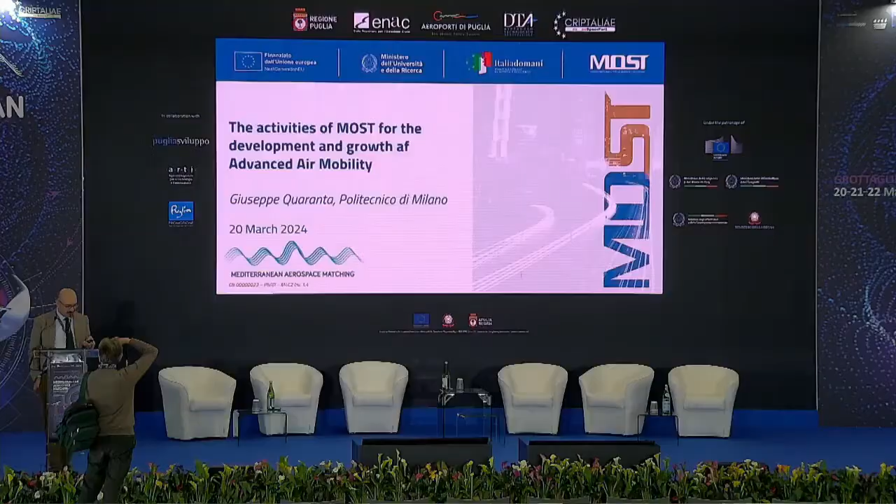So what I will present today is the activity of the MOST, that is Centro Nazionale per la Mobilità Sostenibile.

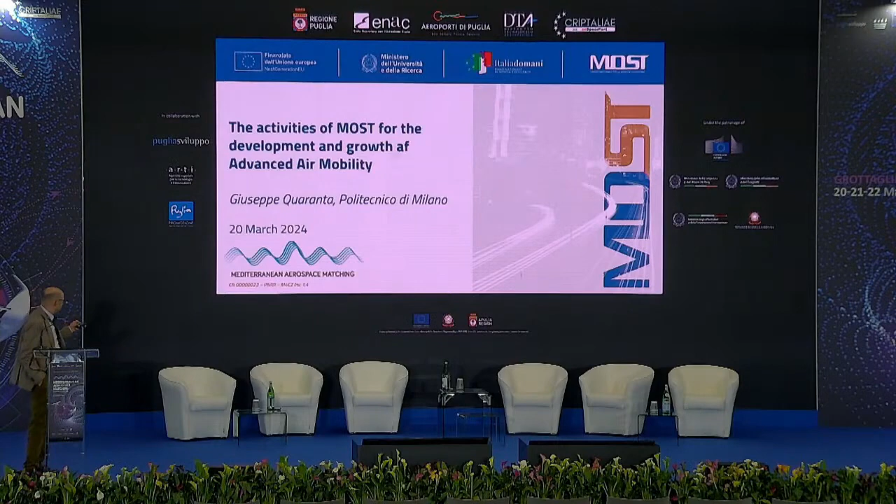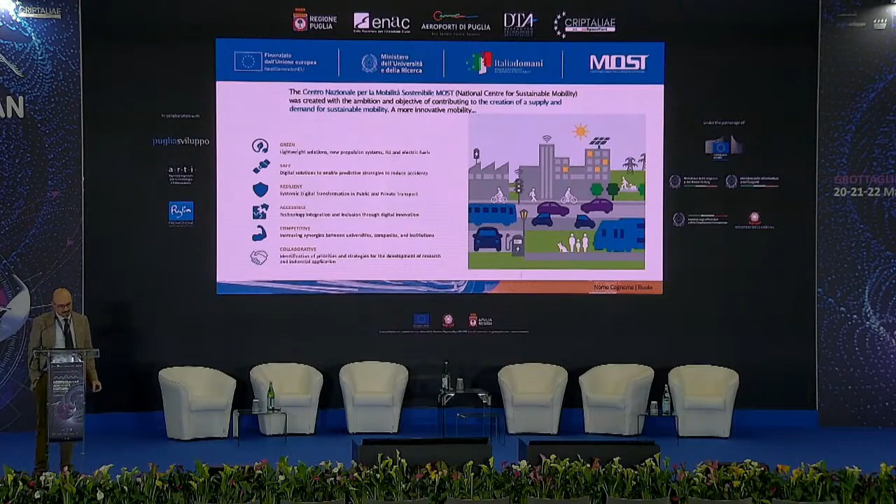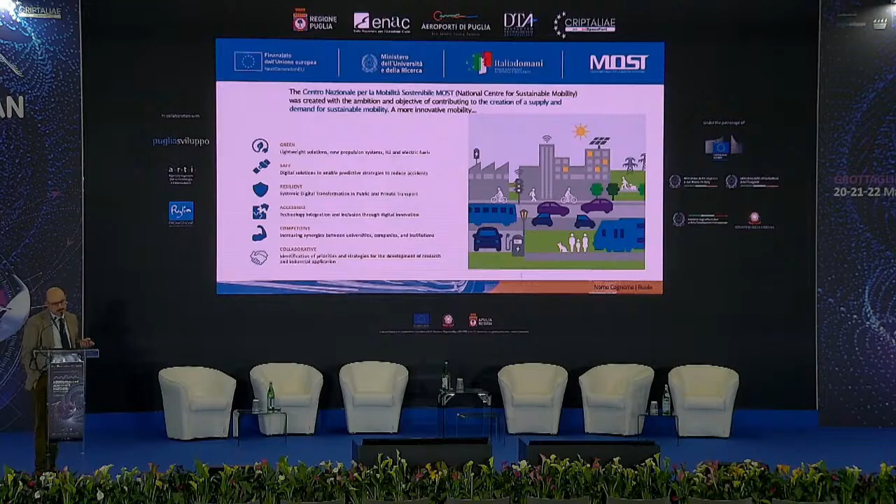Okay, so first, what is MOST? So il Centro Nazionale per la Mobilità Sostenibile has been created with the ambition to support the development of a new way of sustainable mobility. So the more sustainable mobility will be a mobility that will be greener, safer, more resilient, accessible, competitive, and collaborative. MOST is organized with this structure with a hub and a spoke.

So we have a central hub that is coordinating the activity of 14 spokes dedicated to different parts of the ecosystem that compose mobility. The hub manages the program in terms of resources allocation, innovation and education, and initiatives to globally increment the TRL of the projects, while we have several spokes that will work really on the research at high TRL with a collaboration between universities and private companies, and development of local infrastructures and laboratories at the state of the art.

So right now we have 25 universities in Italy that are collaborating in MOST together with research centers, and 24 companies that are major companies operating in Italy in the sector of mobility. So we have Ferrovie Italiane, Autostrade, Ferrari, Pirelli, Poste Italiane, and of course also aerospace companies like Leonardo and Avio Aero. The structure of MOST is a matrix structure.

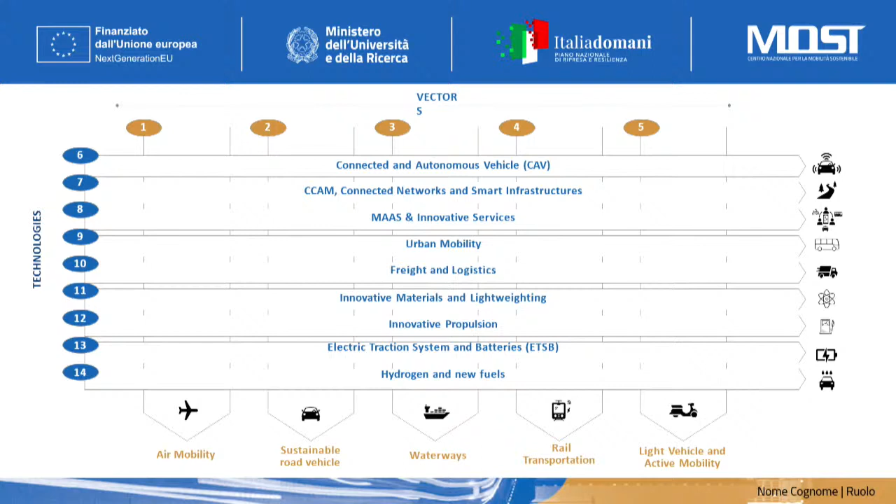In particular, today I'm going to talk about the spoke air mobility, since we are talking here about aerospace. The spoke of air mobility is organized between 6 main universities, is led by Politecnico di Torino, then of course we have Politecnico di Milano, University of Bergamo, Bologna, Federico II, and La Sapienza from Rome. And we have the collaboration of 6 major private companies, Avio Aero, Thales Alenia Space, Teoresi, Accenture, Leonardo, and Poste Italiane.

The objectives are, on one side, the development at spoke-wide level of drones, cargo drones, and urban and advanced air mobility. And on the other side, the development of hybrid electric aircraft, and so technologies that will allow the implementation of hybrid electric aircraft. And on the other side, we have the groups that are working on the development of digital twins and on the development of passenger and goods management in the developed new mobility system. So the spoke is organized around 6 work packages.

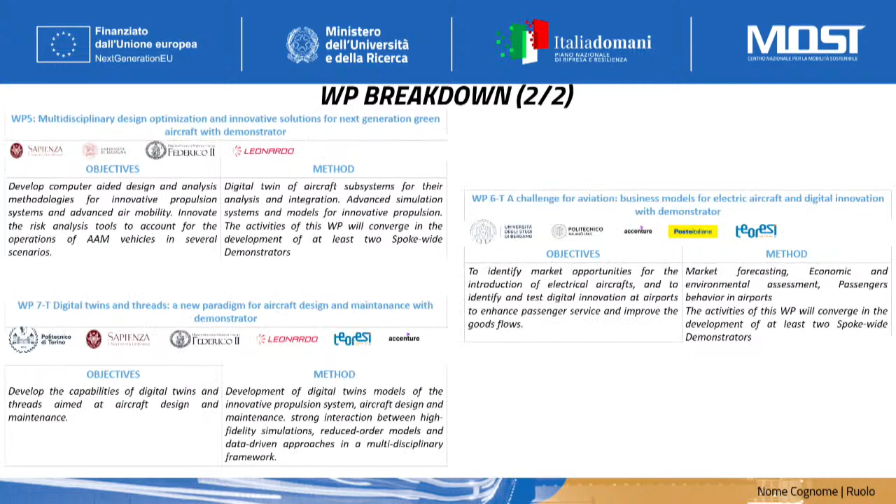Sorry, I need to go. Is there a way to go back?

If we want to reach this goal, so to have those vehicles fly in our cities, there are still some technological hurdles that we have to overcome, but there is also another related to acceptance of those types of vehicles in the urban environment. So the object of the activity of spoke one of MOST dedicated to advanced air mobility is really on the acceptance of those types of vehicles. So we developed several tasks in order to investigate the elements that will mostly affect the acceptance of this type of mobility in the urban environment.

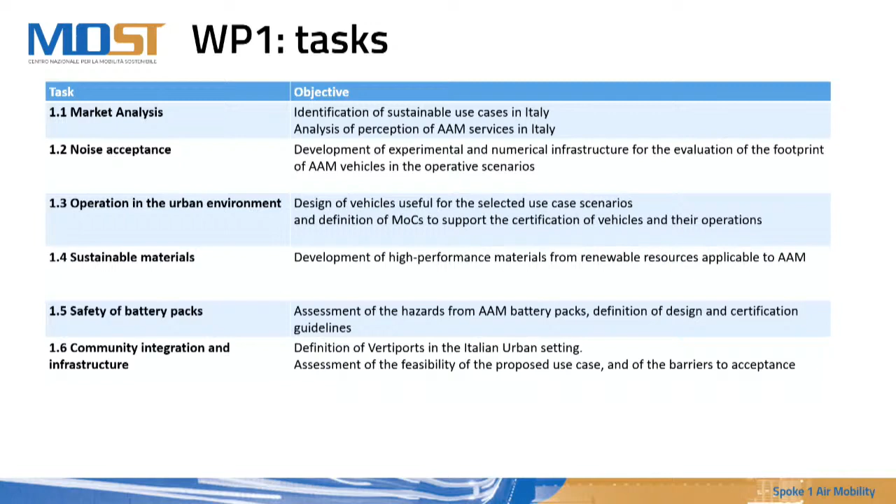In particular, we're going to work on the noise acceptance of operations, and so understanding how safe operations could be implemented in the urban environment. Acceptance related to sustainable materials, safety of batteries, and in particular, what could happen if a battery pack impacts the ground, and acceptance of infrastructure and community acceptance.

I will present just a couple of labs that we are developing. One is a lab dedicated to batteries. A major safety concern is related to the possible impact of batteries on ground. So we are developing a drop tower to drop batteries on different surfaces, ground surfaces, also water, so to understand what is the consequence of an impact of a battery pack, and to design systems that can manage the energy generated in the impact in order to have a safe impact that will not generate any hazard for the public.

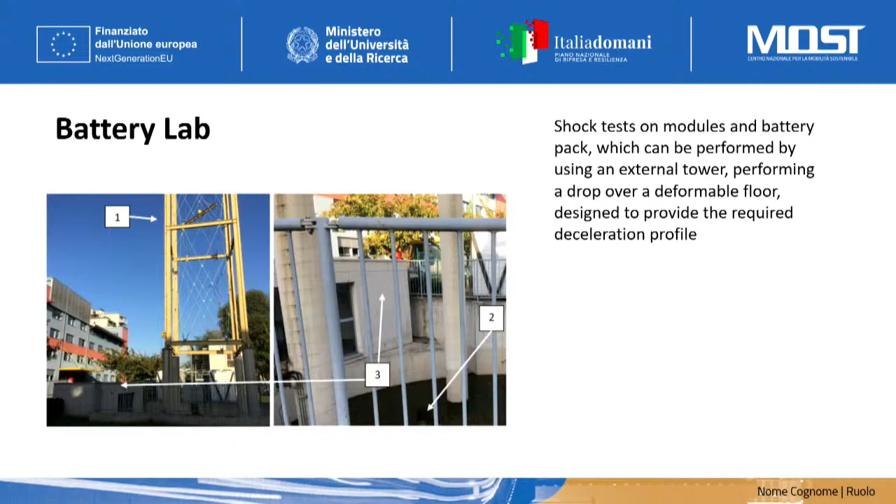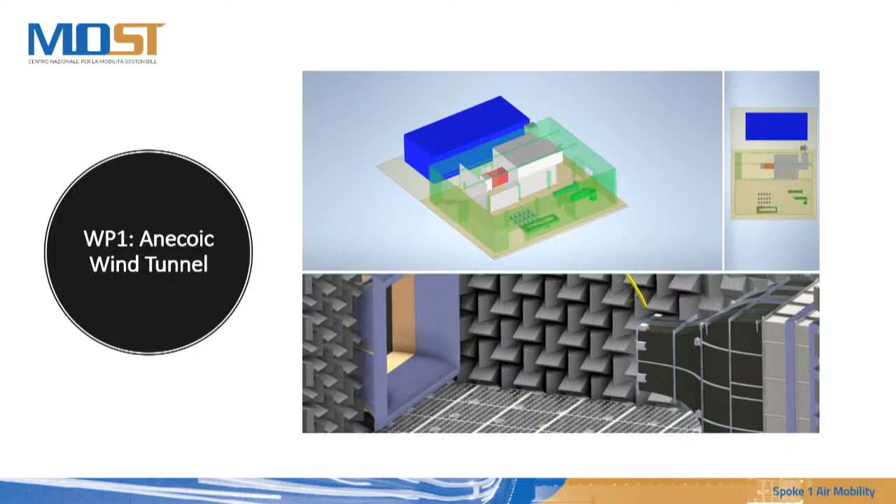The second lab we are developing is the lab dedicated to noise. So we are developing a new anechoic wind tunnel. At Politecnico di Milano, we have a long tradition of wind tunnels. We have a large wind tunnel and a small wind tunnel that are already fully operative, and now we're going to build this noise wind tunnel in order to test noise developed by urban air mobility vehicles, and so assess again what could be the impact of those vehicles in the communities that will see those types of mobility implemented.

The third lab I want to talk about is the lab of certification by simulation. Already Cristina Leone was talking before me about digital twins and the necessity to develop those digital twins also to perform certification activity. The objective we have here is to recreate the environment, the complex wind environment that is generated when those types of vehicles fly close to obstacles, get the data out of test labs and inject those data in a digital twin that will perform a digital simulation, maybe using virtual reality, to assess the safety of different operations in different environmental conditions in this system.

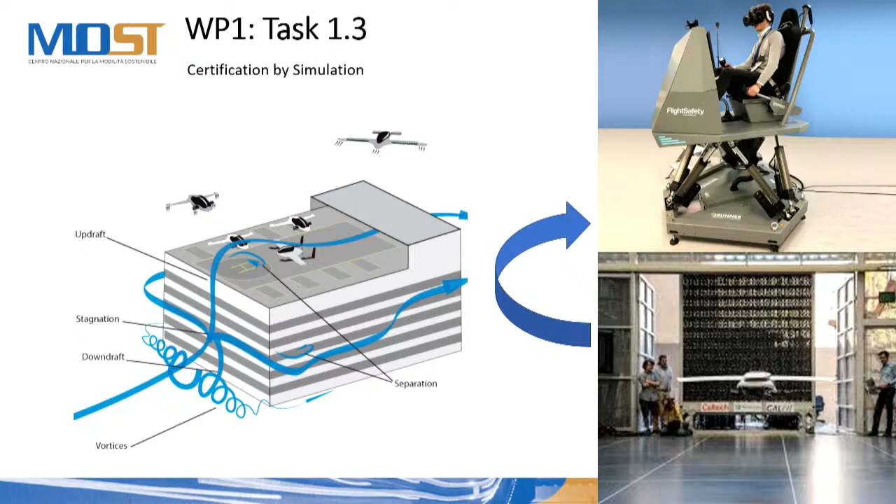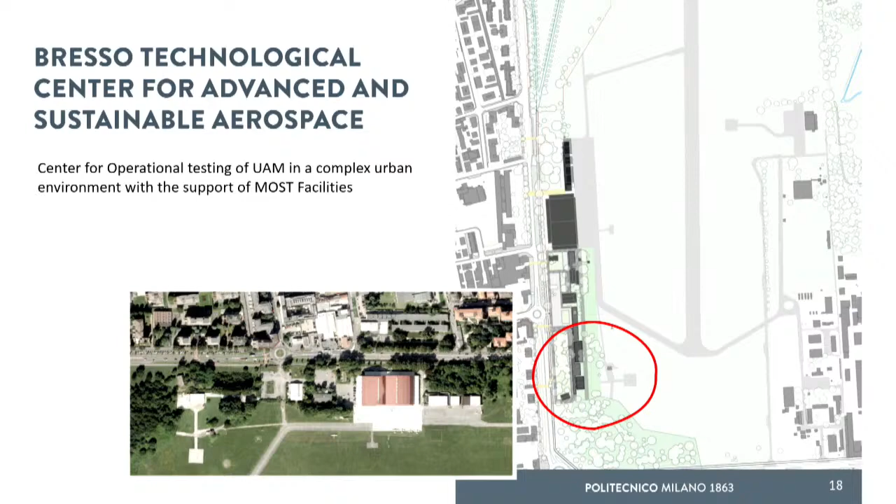All those things will eventually converge into a physical lab that we are trying to develop over the Bresso Airport in Milano. Bresso Airport in Milano is a city airport that is really embedded in the city, in the city of Bresso, very close to Milano. So it is really a prototype of what could be an urban vertiport that could be used as a hub for this type of mobility. So the idea we have at Politecnico di Milano in particular is to develop a testing facility in order to test how urban mobility can operate in a complex urban environment, such as the one of Milano.

The last thing I want to talk about is related to a testing activity that we are trying to perform together with our industrial partner in the Spoke 1 dedicated to air mobility. That is the case of middle-mile drone delivery on minor islands that will be developed by Poste Italiane in collaboration with Leonardo and with the support of the different labs of the Spoke 1 of MOST. The objective of this use case is to implement an activity to transport parcels and mail in difficult-to-reach areas, in particular onto islands, in order to test if we really have the capability to offer a service, so not only to do a simple experiment once, but to offer a continuous service of transmission of parcels and mail.

So the testing activity will allow us to analyze if we have the enabling factors to be able to implement such a service, and also to understand what will be the social acceptance, again, of this type of drone mobility and drone flight on the communities that will see those new systems of mobility implemented in their local area.

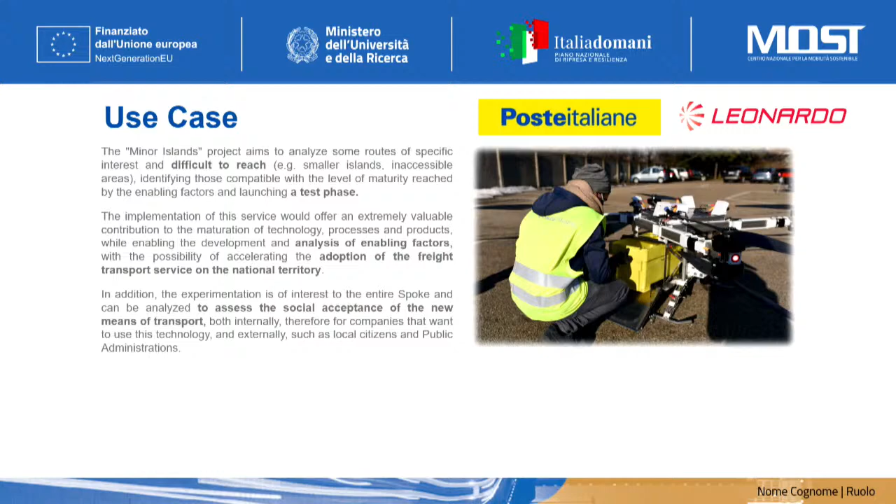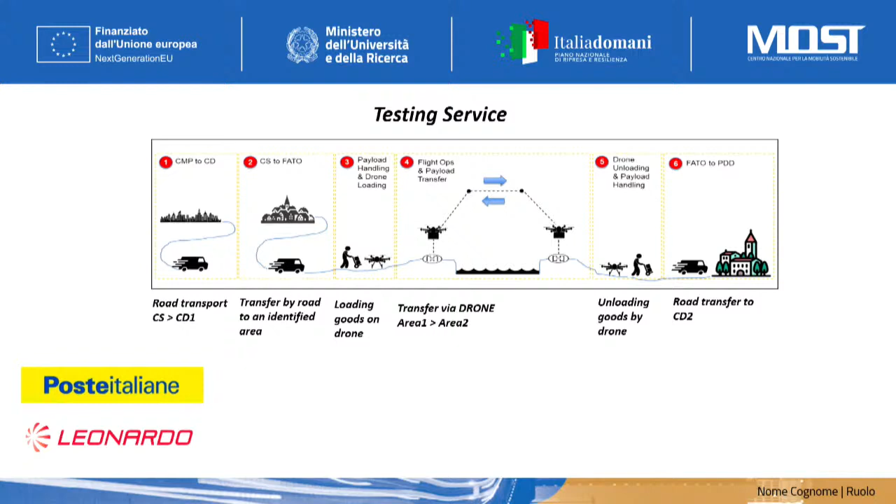So in conclusion, I can say that there are a lot of activities that we are performing in MOST in order to make urban and advanced air mobility a success, hopefully. So we hope to see this type of mobility implemented in the near future in all our cities. And we expect the testing facilities that we are currently developing in MOST to support the capability of the Italian ecosystem to implement technologies to realize advanced air mobility.